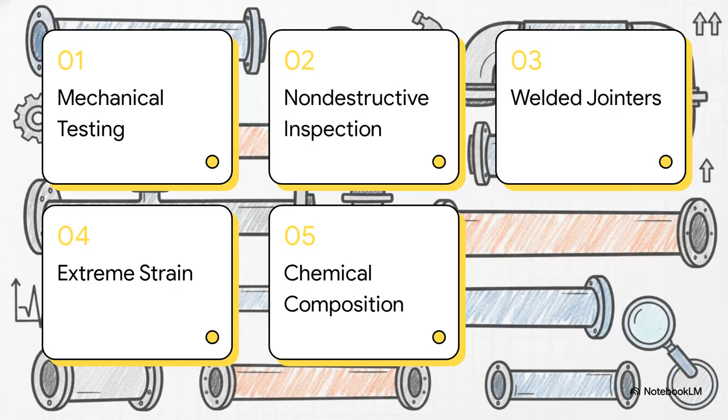All right, to understand exactly how this standard guarantees that safety, we're going to walk through 5 phases. First, mechanical and hardness testing. Second, non-destructive inspection. Third, standards for welded joints. Fourth, engineering for extreme strain. And finally, chemical composition and designations.

Okay, starting off with phase 1, mechanical and hardness testing. To really prove a pipeline's strength, engineers actually have to destroy some of it. It's called destructive testing. Basically, they take sample pieces and push the metal to its absolute limits until it physically breaks. During these tests, specific tiny X marks are mapped out across the arc of the weld. Those aren't random. API 5L strictly dictates the exact, non-negotiable locations where hardness has to be measured, both right on the weld itself and on the surrounding parent metal.

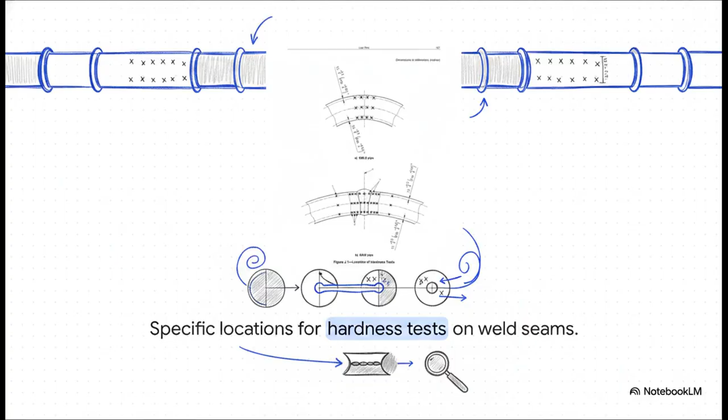The level of precision required here is just fascinating. Step 1, testers have to indent the exact weld center line. Step 2, they move precisely 0.75 millimeters into the parent metal. And step 3, they test at exactly 1.0 millimeter spacing all throughout the visible heat-affected zone. It might sound like a bunch of abstract rules, but this standard forces an incredibly thorough investigation into a notorious hotspot for potential brittle fractures.

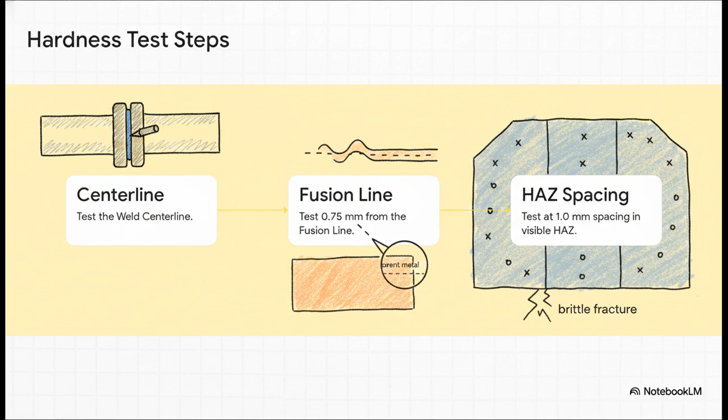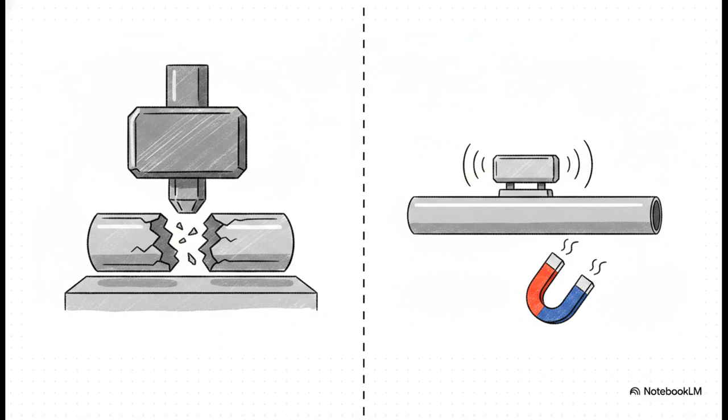Now, while destructive testing is great for verifying the manufacturing process on sample batches, verifying the final service-ready product requires a completely different approach. Obviously, we can't break the pipe we're actually going to put in the ground. So we transition from breaking samples to non-destructive inspection, or NDT. This is where we use things like ultrasonic waves and magnetic fields to validate the finished pipes. Which brings us nicely to phase 2, non-destructive inspection.

You can think of NDT kind of like a super advanced medical ultrasound, but for steel. The equipment is primarily hunting for what we call laminar imperfections. These are basically internal separations hidden deep inside that solid steel wall. The standard specifically defines this as a defect if it extends more than 6.4 millimeters circumferentially, or if the total area of the flaw exceeds 100 square millimeters at the pipe ends. If the equipment pings a flaw even that tiny, boom, that section of pipe is immediately rejected.

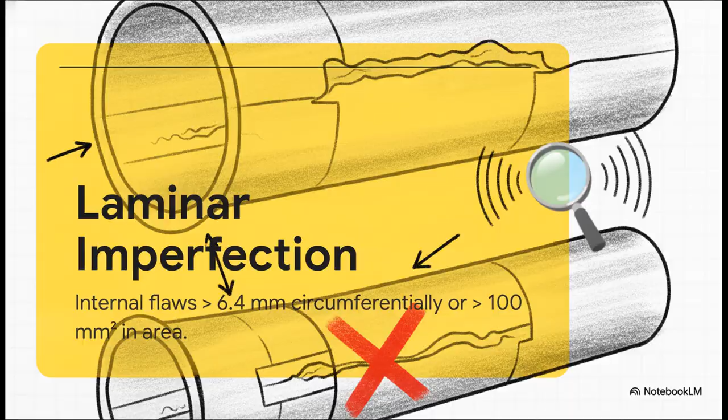No questions asked. And what's really interesting is that these acceptance criteria adapt heavily based on where the pipe is actually going to be used. For a standard offshore pipe body, an internal imperfection can reach a maximum area of 1,000 square millimeters before it's officially classified as a defect. But if you're dealing with sour service conditions, which means highly corrosive environments, that tolerance gets slashed in half down to 500 square millimeters. Basically, the more dangerous the environment, the tighter the margins become for even microscopic flaws.

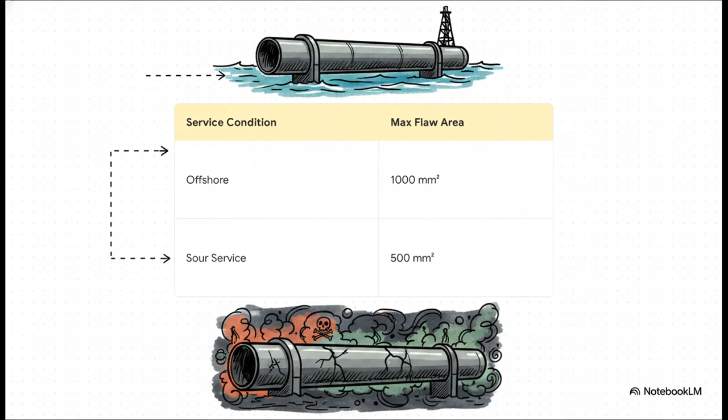So to make sure absolutely zero critical flaws slip through, the standard mandates an intense, and I mean intense, battery of NDT methods. We're talking full-body ultrasonic inspections just to catch longitudinal cracks. They use magnetic particle inspection precisely at the pipe ends and bevels. If it's a seamless pipe, they use the flux leakage method to detect transverse flaws.

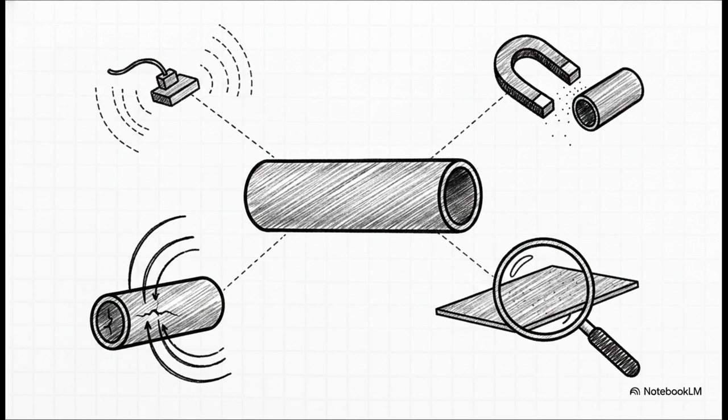And for that sour service we just mentioned, they mandate a 100% inspection of the plate surfaces to detect surface hard layers. They literally leave nothing to chance.

Moving right along to phase 3, standards for welded jointers. Now, pipes usually come out of the mill in standard lengths, right? But when a project site needs a much longer section, they have to join 2 pipes together, which introduces a whole new set of variables. The rules for these jointers are incredibly strict to prevent any weak points.

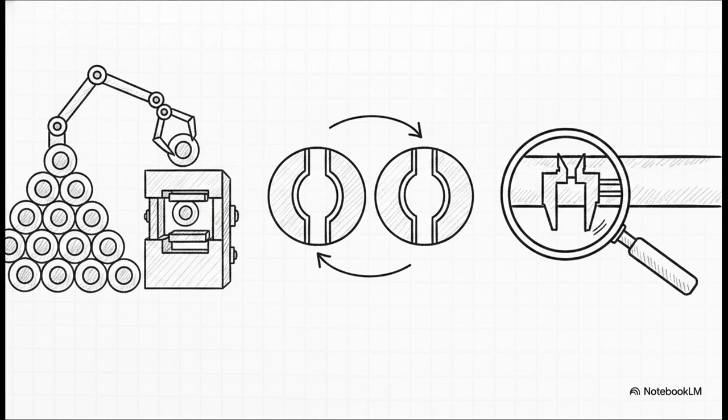For instance, they require destructive testing on at least 1 out of every 100 welded jointers. And when you're joining pipes that have longitudinal weld seams, those seams actually have to have a circumferential separation of between 50 and 200 millimeters. On top of that, geometrically speaking, these massive pipe sections cannot be offset by more than 3.2 millimeters where they connect. It's like a giant, high-stakes puzzle.

But doing the physical welding is really only half the battle. The other half? Meticulous traceability. Every single segment of a jointer has to be explicitly marked. We're talking permanent stencils like Joint A, Heat A, and Joint B, Heat B. This ensures that if a flaw is discovered, say 5 years down the line, engineers can trace the exact batch of steel and even the specific welding operator straight back to the factory.

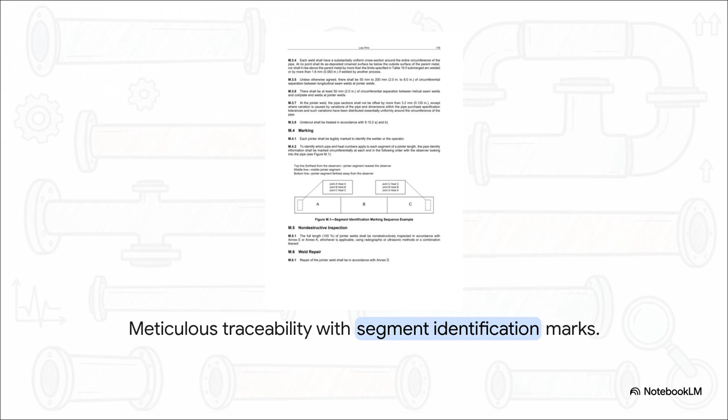It's built-in accountability. Okay, phase 4, engineering for extreme strain. Standard pipelines are mostly designed to withstand internal pressure. But what happens when you cross an active seismic fault line, or shifting permafrost, or install pipes in ultra-deep water? That requires a completely different class of pipe.

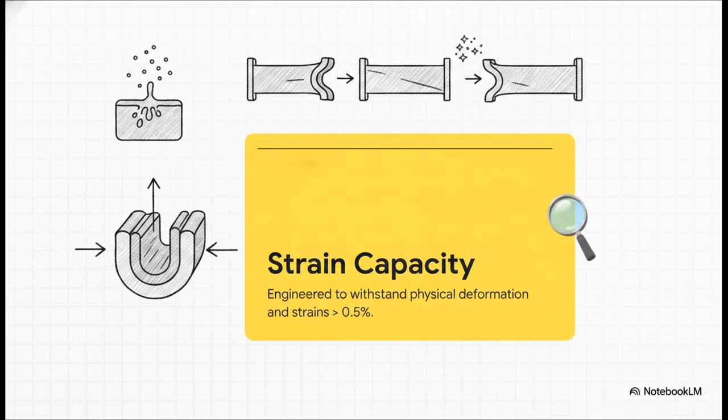We measure this specialized metallurgy by its longitudinal plastic strain capacity. Basically, this pipe is engineered to safely stretch and bend under strains greater than 0.5% without a catastrophic failure. And to pull that off, it requires what's called fully killed steel and incredibly clean steel-making practices to guarantee maximum toughness. And that brings us to our final phase, phase 5, chemical composition and designations.

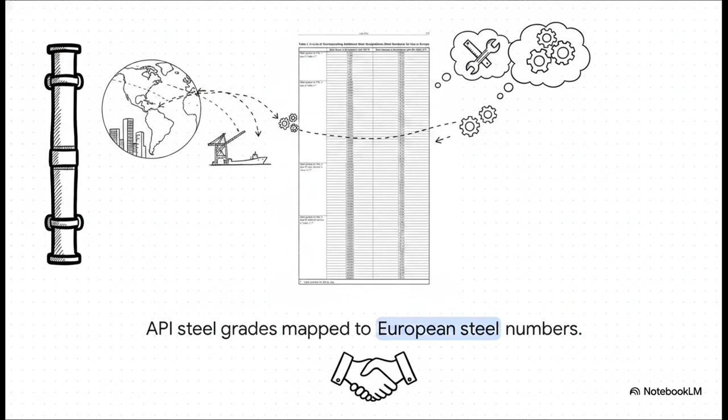So the crucial takeaway here is that everything we've talked about, from hardness to crack resistance to the ability to bend without snapping, is ultimately dictated by the steel's atomic recipe. And because oil and gas is a truly global industry, API 5L acts as this universal language. For example, an API grade L415 maps directly over to the European steel number 1.8725.

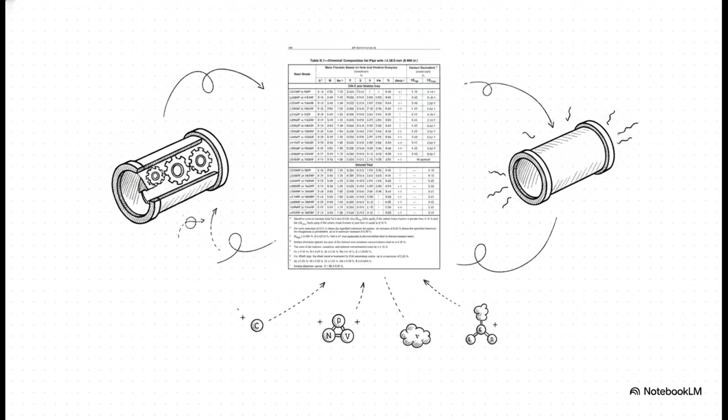This ensures that an engineer sitting in Houston and a fabricator working in Rotterdam are perfectly aligned on the exact same material capabilities. Now, getting those material capabilities right comes down to a highly specific, closely guarded recipe. It's all about the precise mass fractions of elements like carbon, manganese, phosphorus, sulfur, and vital microalloys like niobium, vanadium, and titanium. Adjusting any of these elements by even a tiny fraction of a percent completely changes how that steel is going to behave under stress.

To put into perspective just how precise this has to be, let's look at the number 0.17%. That tiny fraction is the absolute maximum allowable carbon mass fraction for high-strength, extreme-strain pipe grades like X80. If you add too much carbon, the steel becomes way too brittle and won't bend. But if you have too little, it loses its structural strength.

So pipeline engineers are effectively custom-baking this steel at a molecular level just to perfectly balance strength and flexibility. They are literally preventing environmental disasters before they even have a chance to happen. From pounding a weld with a hardness tester to balancing microalloys down to a fraction of a single percent, the anatomy of pipeline integrity really is a masterclass in risk management.

But it definitely leaves us with a provocative question to chew on. As global energy demands inevitably push our pipelines into even deeper waters, higher pressures, and incredibly harsh Arctic environments, how are these standards and the material science behind them going to evolve to conquer the next frontier of extreme engineering? It's something to think about.